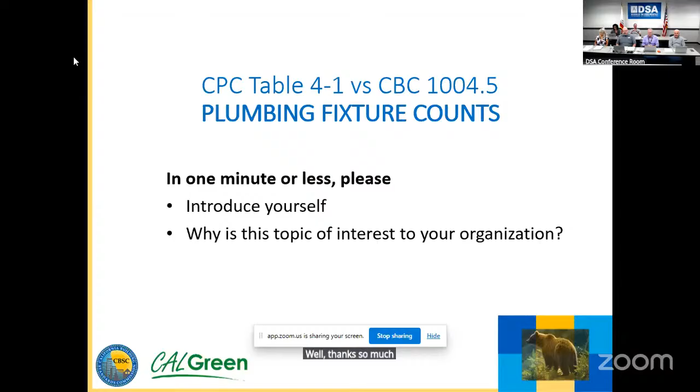One thing we want to talk about is that the Building Standards Commission and the Division of the State Architect amendments to Title 24, including those in the plumbing code, are limited in scope, based on statutory authority. I'll start with DSA structural safety. As it relates to Part 5, DSA is the enforcement entity. We also have the authority to adopt regulations for California public schools and community colleges. We have other authorities outside of the context of this discussion, but I'll limit it to that.

For the Building Standards Commission, when you see the BSC banner next to a state amendment in the plumbing code, pursuant to Chapter 1 of that code, the Building Standards Commission has authority for state-owned buildings, University of California and California State University buildings. We also have a BSCCG banner for CalGreen that doesn't really apply in this situation. So for the most part, what we're going to be talking about today is amendments made under the BSC banner for state buildings, UC and CSU buildings.

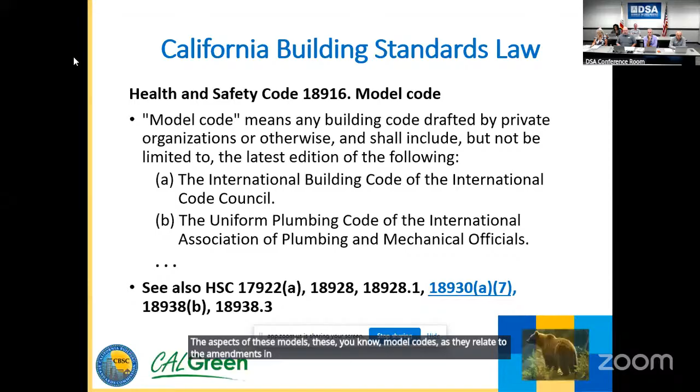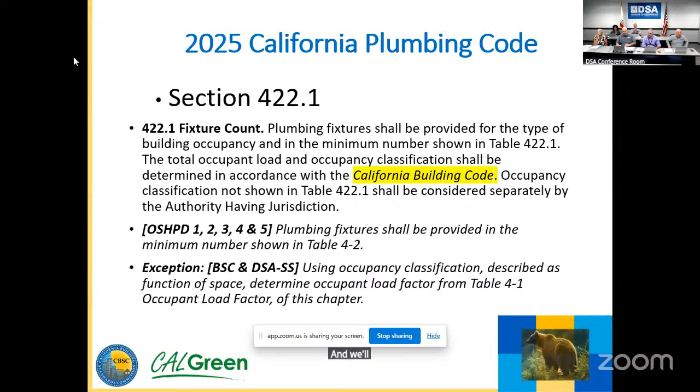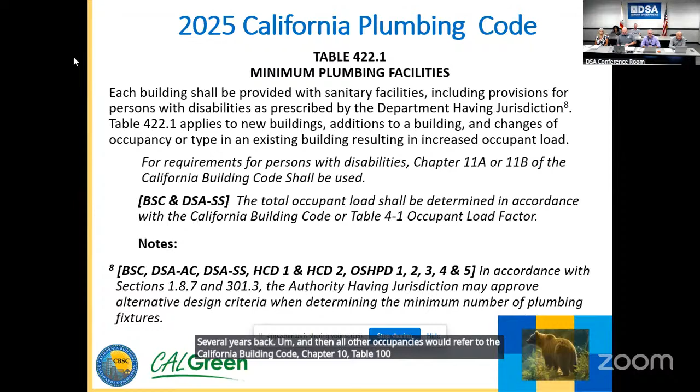And then all other occupancies would refer to the California Building Code, Chapter 10, Table 1004.5 in most cases.

In that 2019 intervening code cycle, BSC and DSA held a similar workshop. This is when we revised and renamed Table A to Table 4-1. We're going to get into a little bit of the history there a little bit later in the presentation, but we just wanted to share this with you now.

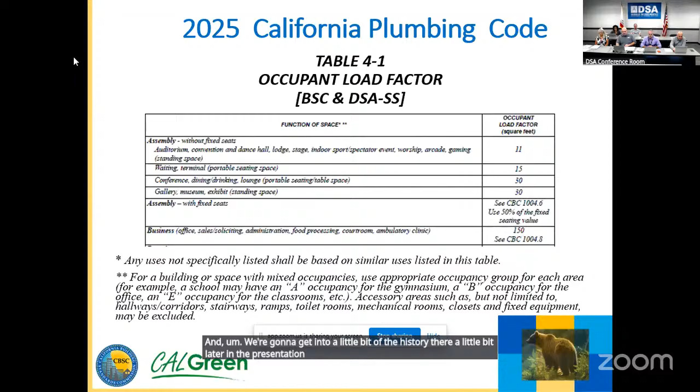So now what we wanted to do is list a few options that we'd like to consider for discussion during this workshop. Basically, we're going to talk about these options, the pros and the cons. We'll take each one in part, and then we're going to take a step back and look at some of the history, of how we got here. Beth had worked with DSA and other folks to come up with some different scenarios for different building types and the plumbing calculations. So that's kind of the order of operations we're gonna take.

Before we go through these options, I just wanted to check in and see if anyone had any comments or questions on anything thus far. Seeing, hearing none? No. You hit the hide button for your sharing. Oh yeah, is that better?

Yeah, okay, thanks, Barbara. So there's technically 5 options, but we've got them numbered here. The first option we're going to look at that has been suggested to address this issue is to delete Table 4-1 from the California Plumbing Code, the co-adopted BSC and DSA state amendment that's pretty much been in there since I think 2009. So we'll talk about the pros and cons of that option.

The second option we've broken out into 2. It would be to further amend Table 4-1. The first option, 2A, would be to remove functions of space that don't align with the DSA and BSC authorities, which are K-12 schools, community colleges for DSA, and then state buildings, UC and CSU buildings for BSC.

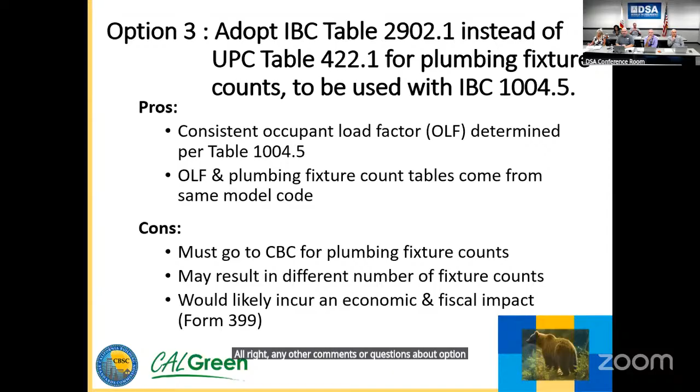Any other comments or questions about option 3? Okay, seeing none, we'll move on.

Option 4, similarly, would be to insert table 2902.1, basically copy and paste it from the IBC into California Plumbing Code Chapter 4 for BSC and DSA occupancy. It would be a state amendment similar to table 4-1 that would replace it. Some pros would be that the occupant load factor and plumbing fixture count tables would come from the same model code, since table 2902.1 and 1004.5 both come from the IBC. But the cons would be it could cause confusion with the regulated community, and again incur an economic and fiscal impact statement for the agencies.

So instead of adopting it in the building code, Chapter 29 would still have the placeholder that says not adopted by California, but BSC and DSA could take the language from table 2902.1 and basically replace table 4-1 with that language.

Just want to see if there's any comments or questions about that option from the folks in the room. Seeing none? Okay, we'll come back to a lot of these later if somebody thinks of something or wants to jump in.

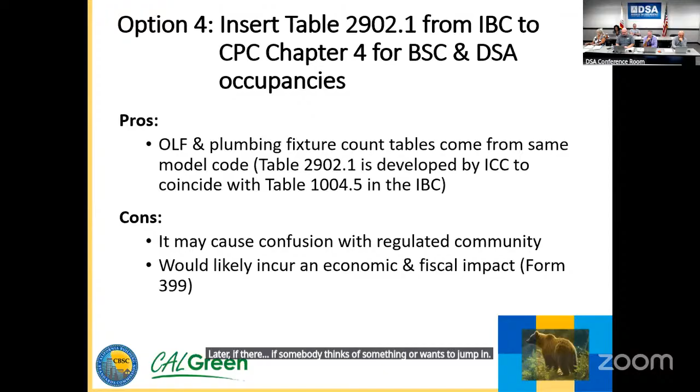So now we've talked about some of the options that BSC and DSA are considering. We appreciate everyone's comments. We're going to touch on some of the history of how we got here now, for context, before we start looking at some of the scenarios we've come up with for some of the calculations.

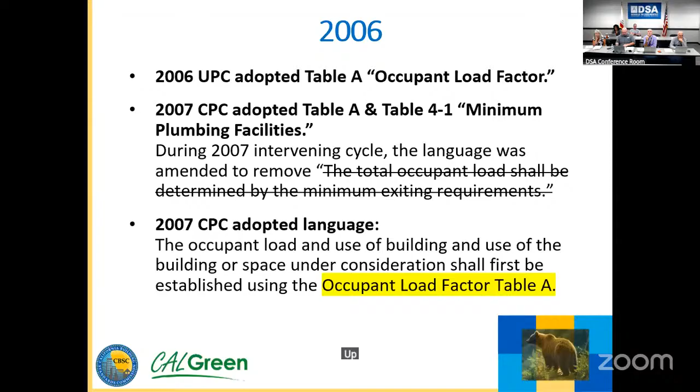Enrique Gonzalez with IAPMO covered a lot of this, but for context, the 2006 Uniform Plumbing Code had what was previously called Table A for occupant load factor included. It was a model code table. Then into the 2007 California Plumbing Code, which adopted the 2006 UPC, that code adopted Table A and Table 4-1, which later became 422.1 for fixture counts. During the 2007 intervening cycle, they made changes to the language for occupant load factor, pointing to UPC Table A for occupant load factor. So it was all contained in the plumbing code back then.

Jumping ahead three years, in 2009 Table A was removed from the Uniform Plumbing Code. And in 2010, for the 2010 California Plumbing Code, this predates pretty much everyone currently on staff, but basically BSC and DSA adopted Table A even though it had been removed from the UPC, and that's when it first became a state amendment in Title 24 in the Plumbing Code. They preserved the name and kept it as Table A.

As far as the charging language, BSC and DSA kind of kept that previous model code language that was in the 2006 UPC, which said total occupant load shall be determined in accordance with occupant load factor Table A. We just attached the BSC and DSA banners to let the regulated community know that this was now a state amendment. It was not model code.

I think there was some confusion when this happened because formatting wise, we've looked back, Beth did a lot of research, and it wasn't italicized as it should have been. I think we didn't fix that until later. So it still looked like it was model code language, but it did have the banners next to the charging language, and I believe it had the X's in the matrix adoption table.

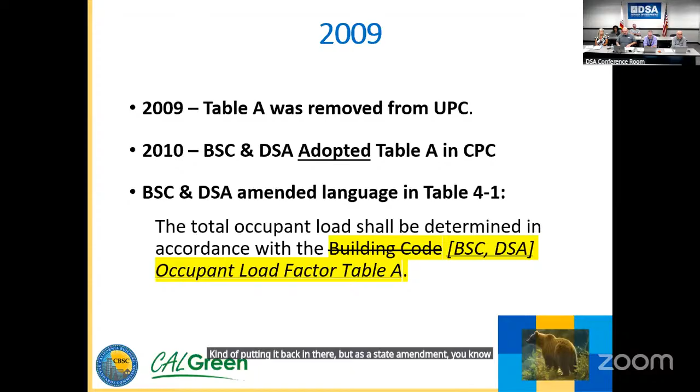Just moving ahead a little bit, in 2012, the Uniform Plumbing Code, IAPMO added language in section 422.1. This was where they indicated that to determine occupant load factor would be in accordance with the building code, which is still in there today. And then again, BSC and DSA amended that section to, at that point, instead of point to the building code, it was just amended to point to occupant load factor Table A.

So back then we struck the reference to the building code, and again, that was kind of confusing too, because technically it's a state amendment made by BSC and DSA, but it was kind of limiting what the rest of the code would apply to. So we didn't really get it right at that point.

We were, each time we update these amendments, we have to update the charging language and the note under table 422.1: the total occupant load shall be determined in accordance with occupant load factor table A. So those are changes that we made in the 2012 triennial cycle for the 2013 code, and those remained for some time.

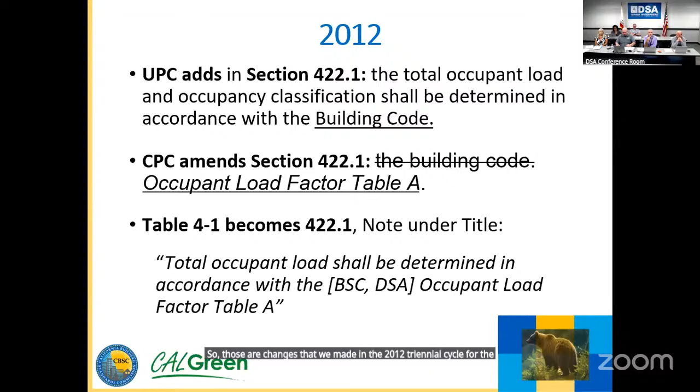And then fast forward to both the 2015 and the 2018 UPC, there were no changes, so it kind of remained static. BSC and DSA continued to carry forward Table A and our co-adopted amendments in table 422.1 without anything new. And during this time, this is when we started getting a lot of calls about the confusion about why we had removed the pointer to the building code, I think.

And then, so again, fast forward to the 2019 intervening cycle when we had a similar workshop, BSC and DSA renamed table A to table 4-1, just to kind of align more with the Uniform Plumbing Code's numbering sequence at that point. And then we amended the charging language in 422.1 fixture count.

And this is where we said the total occupant load and occupancy classification shall be determined in accordance with the California Building Code, which is what the model code states. We previously had 'or occupant load factor table A.' So in the prior cycle, we realized that we weren't supposed to just cut out the building code.

So that's where it first truly became an option, where, like Enrique was saying, you could either use table 1004.5 ingress egress for determining your occupant load factor, or if your functions of space align with table 4-1, you could use that as an alternative. And that's where BSC and DSA, instead of trying to do this in the charging language, made it more of an exception.

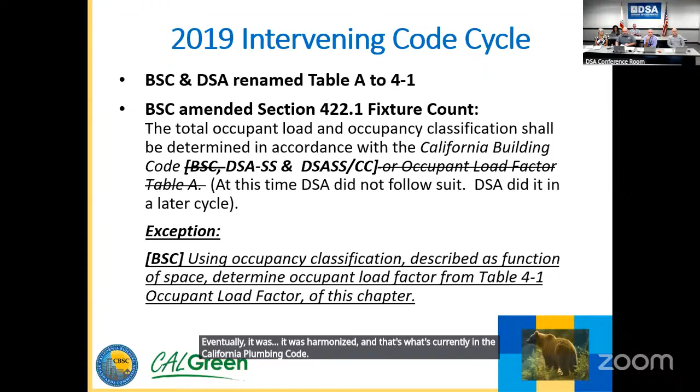So once again, in the 2019 intervening cycle, some specific changes that DSA and BSC made to table 4-1: we replaced occupancy with function of space. I think the intent of this was to more closely align with CPC table 422.1. Many of the occupant load factors, the square footages, were updated or changed based on comments we received from stakeholders and calculations that we ran on different scenarios.

It was identified that using CBC table 1004.5 sometimes generated disproportionate increases in fixture requirements for some uses. This was how CPC alternate table A was seen to provide equitable occupant load figures for the majority of functional uses. Back then, table 4-1 was intended to improve upon table A and remains an alternative to CBC table 1004.5 in providing proportionate occupant load figures used to determine plumbing fixture count minimums.

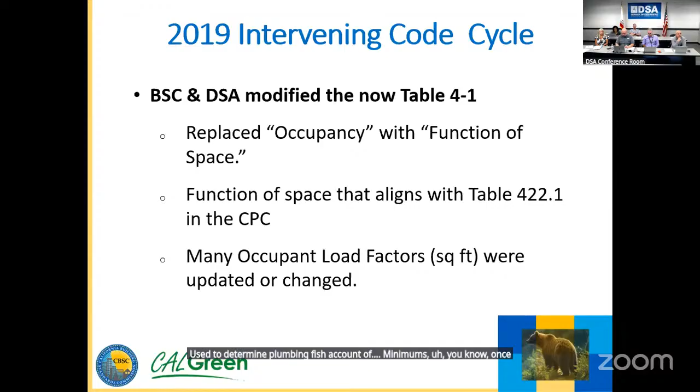So some issues with California Building Code table 1004.5 occupant load, as many folks have already said, this table is primarily used for egress occupant load. So it doesn't necessarily line up with determining plumbing fixture counts for all occupancies and functions of space. There's an incomplete listing of functions that will necessitate plumbing fixtures, and then listing of functions that have no bearing on plumbing fixture use.

Consideration has been given to the nature of the actual use for the functions. This was some research that was done back in the 2019 intervening cycle activity, particularly transient functions versus destination functions, which bears directly on plumbing facility use.

As an example, a business staff member may use a parking structure, transient, to gain access to a lobby and corridor, transient, to gain access to an office, destination. That staff member can only occupy one of those places at a time and requires the use of parking and lobby or corridor to reach the destination function of office. So the staff member should contribute to plumbing fixture loads only from the standpoint of the primary use, office.

In this slide, a number of categories of CBC table 1004.5, in those cases, would yield excessive occupant load values, hence the notion to retain the availability of then table A, which was later changed to table 4-1 as an alternate method. So I'll pause there and see if anyone has any questions or comments before we move on.

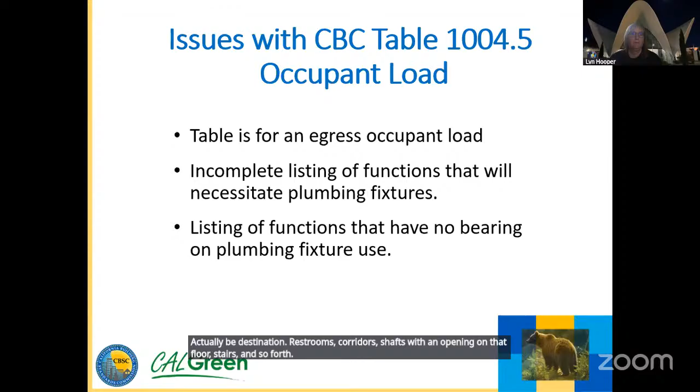Understood, thank you so much, Lyn. Was there—oh, okay, Enrique, go ahead.

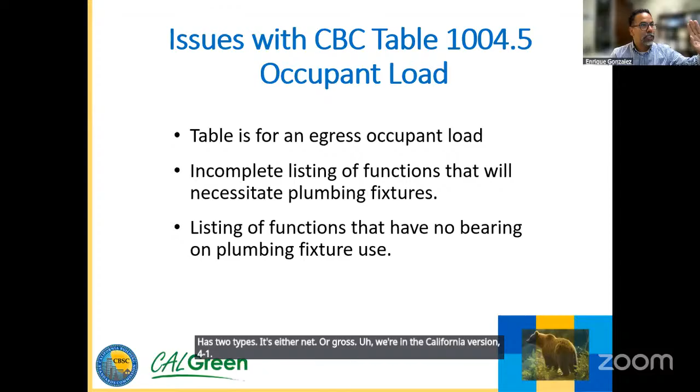Thank you, everyone. I just want to elaborate a little bit on what Lyn said, because that's another thing I tried studying when I saw the concern about table 4-1, which is kind of harmonizing with the building code version of it in 1004.5. However, 1004.5, as Lyn was indicating, is based off two scenarios, which is gross or net, and that's kind of where I don't see it in California. I just want to point that out for clarity—the IBC version has two types, either net or gross, whereas the California version, 4-1, is just an occupancy load factor.

Yeah, thank you, Enrique. And I know we've talked about this with DSA, and I do have some notes from when we discussed this in 2019. Floor area gross is area measured within the perimeter formed by the inside surface of the exterior walls. The area of all occupiable and non-occupiable spaces, including mechanical and elevator shafts, toilet rooms, closets, and mechanical equipment rooms, are included in the gross floor area.

This area could also include any covered porches, carports, or other exterior space intended to be used as part of the building's occupiable space. Floor area net is an area intended to include only the room areas that are used for specific occupancy purposes and does not include circulation areas such as corridors, ramps, stairways, service and utility spaces, such as toilet rooms, mechanical and electrical equipment rooms.

Net floor area is typically measured between inside faces of walls within a room. The use of net and gross floor areas is intended to provide a refinement in the occupant load determination. The gross floor area technique applied to a building only allows the deduction of exterior walls, vent shafts, and interior courts from the planned area of the building. The net floor area permits the exclusion of certain spaces that would be included in the gross floor area. The net floor area is intended to apply to the actual occupied floor areas.

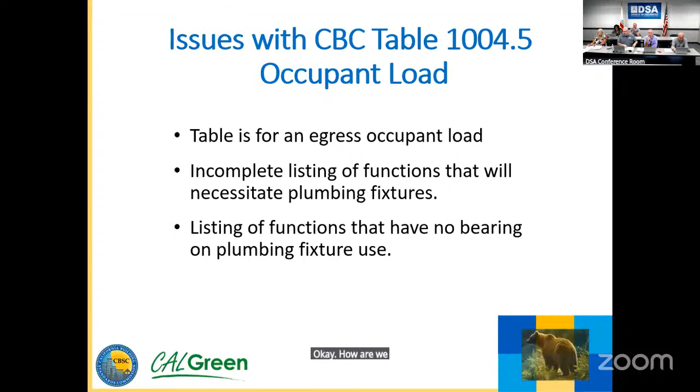Any other comments or questions on that before we move on? Okay, and how are we doing on time? Everybody doing okay? Yeah, okay. All right, so...

We talked about some of the different scenarios that we calculated. I'm going to turn it over to my counterpart, Beth Maynard, Associate Construction Analyst. She worked really hard with DSA and other BSC staff and stakeholders to come up with some calculations, and I think we've got a bunch that we'd like to look at. Some of these might touch on what Ellen Owens was asking about earlier. Beth, I'll defer to your notes, so we can go as far into the weeds as you want and see what folks say.

Thank you. Hi, good afternoon everybody. This first table here is the assembly occupancy, and what I did was I calculated out for conference and then added dining. So when you see the parentheses in the table, that's when we added for the dining. This table compares the CPC, California Plumbing Code, tables 4.1 and 422.1 in the first column.

And if you start calculating from the first column to the second column, then table 1004 from the California Building Code with table 422.1 is in the third column. And in the fourth column, we have table 1004.5 and table 2902.1. All of these tables that I'm going through are set up like that, so when I talk about them, just note that the second column is table 4.1 and so on.

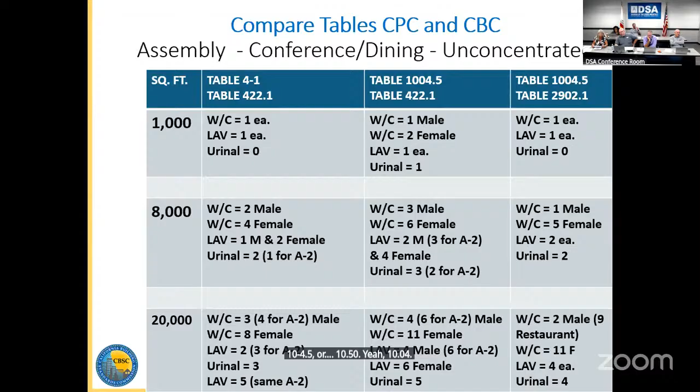Yeah, 1004.5. So next we're going to go to assembly with fixed seating, which my notes are better for. Okay, and this again used assembly with fixed seats for function of space for all 3 columns, to determine occupant load for the required number of plumbing fixture units. So the first column there, and first row, is 50 seats.

And column 2, using table 4-1, the occupant load was 25, and table 4-1 uses 50% of each of the seating values. The third and fourth columns, using CBC table 1004.5, the occupant load was 50.

CPC table 422.1 note 3 states the total number of required water closets for females shall not be less than the total number of required water closets and urinals for males.

BSC amendment for BSC occupancies: this requirement shall not apply when single occupancy toilet facilities are provided for each sex, and in an A or E occupancy with an occupant load of less than 50. Either A, the required urinal shall be permitted to be omitted, or B, if installed, the urinal shall not require a second water closet to be provided for the female.

So urinals can be omitted per CPC table 422.1 note 3A for BSC regulated occupancies.

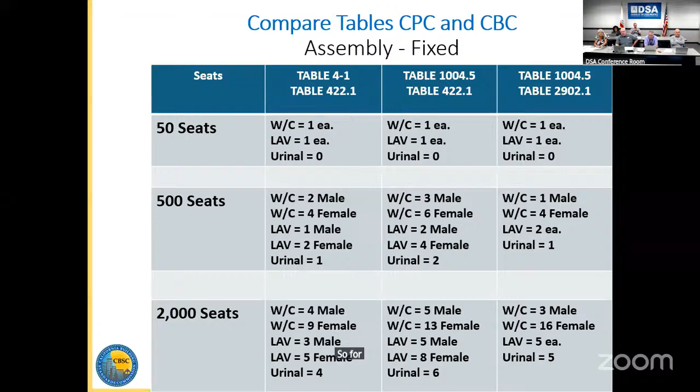So for the next one, we've got business occupancy. Using the business as function of space in the California Plumbing Code Table 4-1 and the CBC Table 1004.5 to determine the occupant load for the required number of plumbing fixture units.

So the row, 3,750, your occupant load for all three columns in this one is 25 person occupant load.

What I've noted is that the footnote to table 4.1 complicates the issue, using it may yield a different occupant load even for the same size building. The footnote states accessory areas such as, but not limited to, hallways, corridors, stairways, ramps, toilet rooms, mechanical rooms, closets, and fixed equipment may be excluded. That's the same situation you were just referring to in the couple previous slides.

CPC section 422.2, separate facilities exception 3, is used in the second and third columns. It states, in business and mercantile occupancies with total occupant load of 50 or less, including customers and employees, one toilet facility designed for use by no more than one person at a time shall be permitted for both sexes.

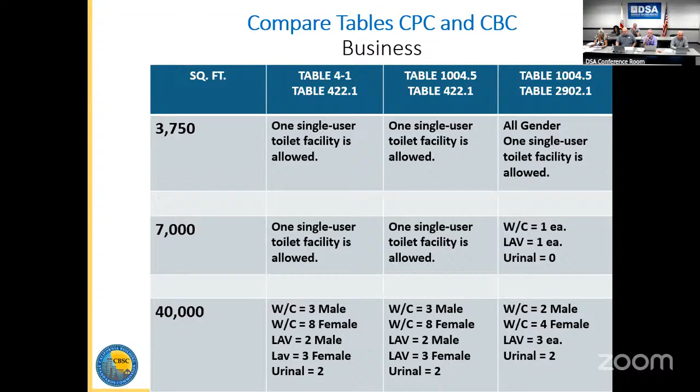Did you want to jump to the next one? Yeah, let's go ahead and jump to the next one. So we'll just bypass this as the business.

For the summary, there's no difference between occupant load values in the CBC table 1004.5 and CPC table 4.1. As a result, the required number of plumbing fixtures calculated per table 422.1 is the same while using the California Building Code table 1004.5 or CPC table 4-1. However, for the same number of plumbing occupants, the required number of plumbing fixtures differs if CBC chapter 29 is used in calculations.

Occupant load calculations are the same. So table 4.1 in CPC and chapter 10 in CBC result in the same numbers. The required number of plumbing fixtures is within one or two fixtures using the California Plumbing Code versus the California Building Code Chapter 29.

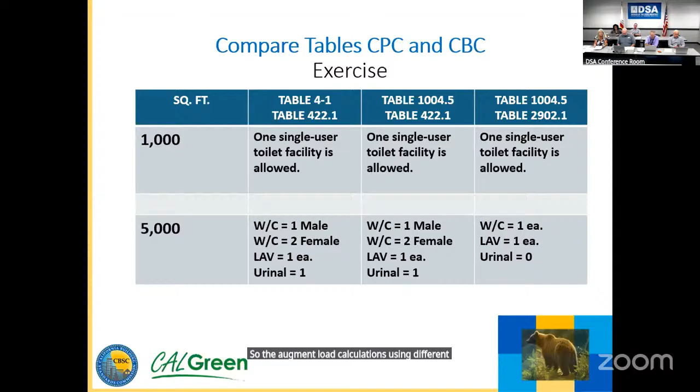So occupant load calculations using different methods result essentially in the same number. The 5,000 square foot exercise room using an A3 occupancy has an occupant load of 100 for all three columns. Occupant load calculations using different methods result in almost the same numbers. So final summary on that.

Next, we'll go on to the kitchen, using kitchen as a function of space.

Comparing - so let me go to the summary. The occupant load factor in the California Building Table 1004.5 for commercial kitchens is 4 times greater than the one in the CPC Table 4-1. As the facility becomes larger, the difference in the required number of plumbing fixtures will become significantly greater. Additionally, the CPC Table 422.1 is not specific about commercial kitchens.

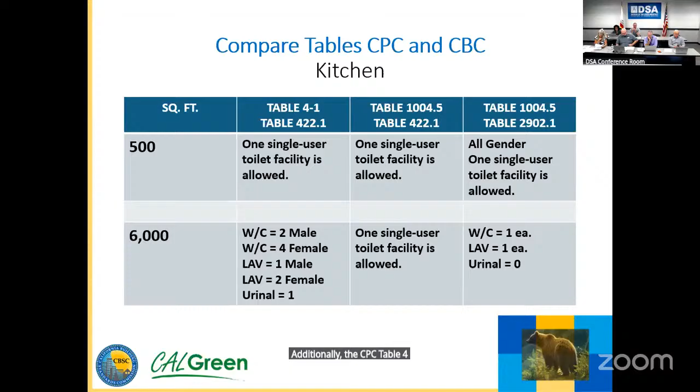Moving on to laboratory. So non-educational laboratory occupant load values are the same between the Plumbing Code Table 4.1 and the CBC Table 1004.5. As business occupancy, the required number of fixtures is similar between the Plumbing Code and the Building Code. But CPC requires more fixtures for female occupants at greater occupancies.

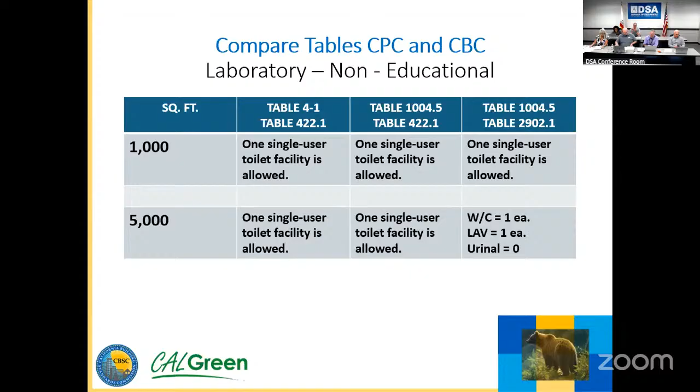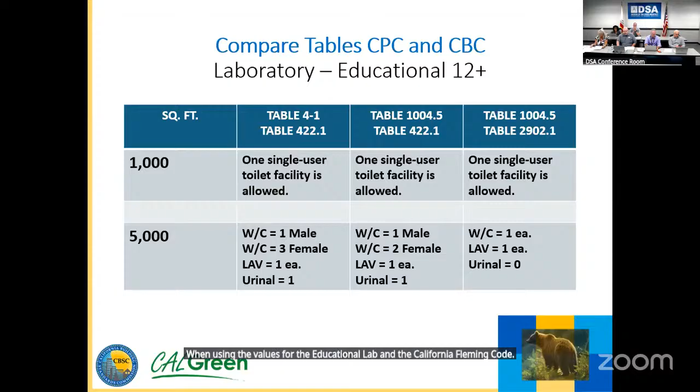Mercantile. So there's no difference between the occupant load values in the California Building Code Table 1004.5 and the California Plumbing Code Table 4-1. As a result, the required number of plumbing fixtures calculated per Table 422.1 is the same whether using Table 1004.5 or CPC Table 4-1. However, for the same number of plumbing occupants, the required number of plumbing fixtures for establishments over 50,000 square foot is smaller if CBC Chapter 29 is used in the calculations.

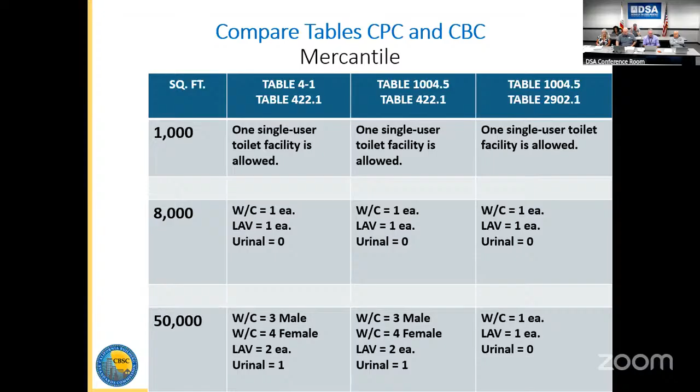Thank you, Beth. Yeah, I think kind of like Enrique said before, depending on which occupant load factor table is used, it's going to yield different counts. We have these posted on our website and we do get a lot of calls and emails, a lot of times from architects and designers that run into some of these scenarios. So we appreciate any feedback and comments or questions that folks have.